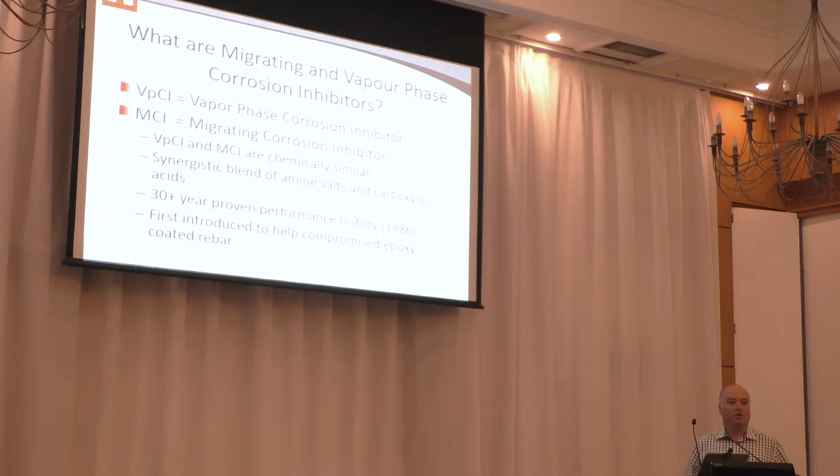So I'd like to start by telling you a bit about vapour phase and migrating corrosion inhibitors. And essentially, they're the same thing, the same technology. They're a blend of amine salts and carboxylic acid. They work in different applications. Migrating corrosion inhibitors are generally for concrete, and they work by migrating into the concrete, or as a vapour into the concrete, to the rebar, and the vapour phase ones are generally for all other types of applications.

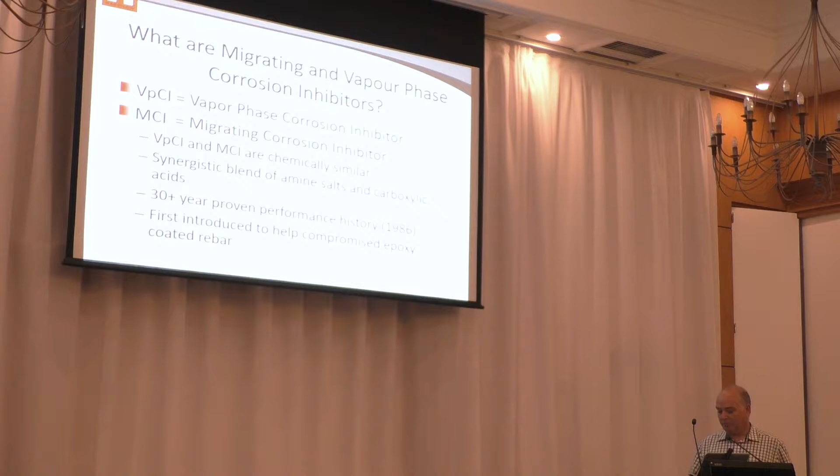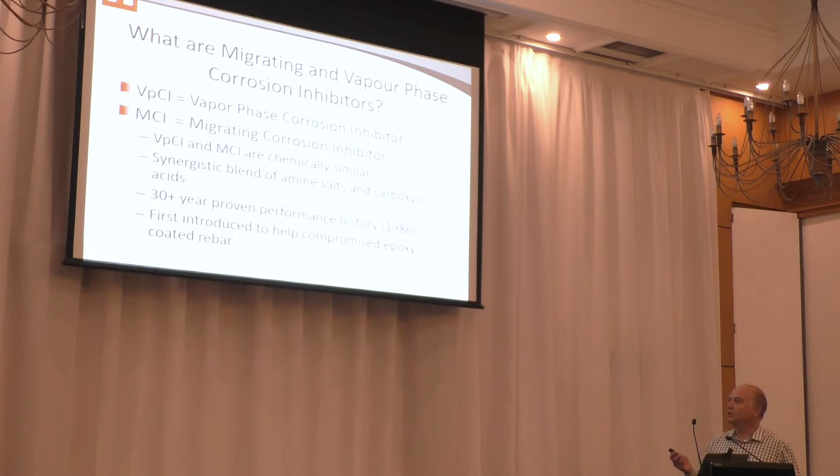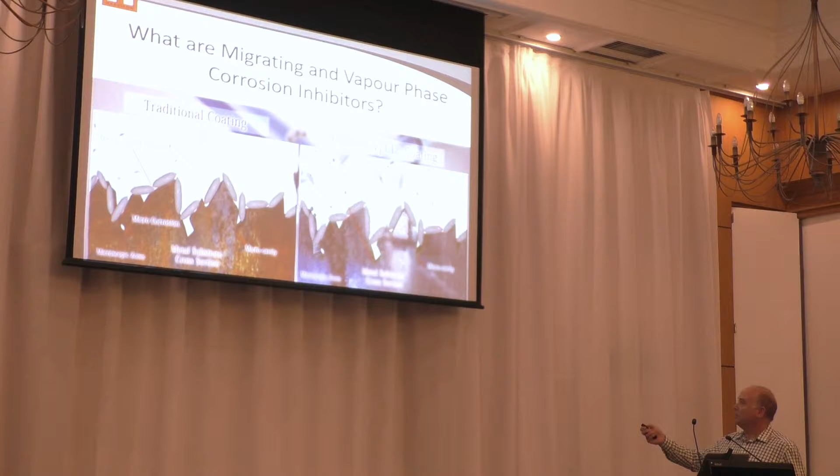Been around for a long time, been used in a lot of different applications. They're one of those other dark arts that we talked about, and there's a good photo of dark art coming up as well. So it's not a great photo, and it's no representation of any of our coating suppliers in the room, but you'll see with the traditional coating there are a few gaps here and there, but with the vapour phase, the theory is that vapour goes down into those gaps and seals them off. So you've got full protection at the monomolecular level with a very good coating over the top of it.

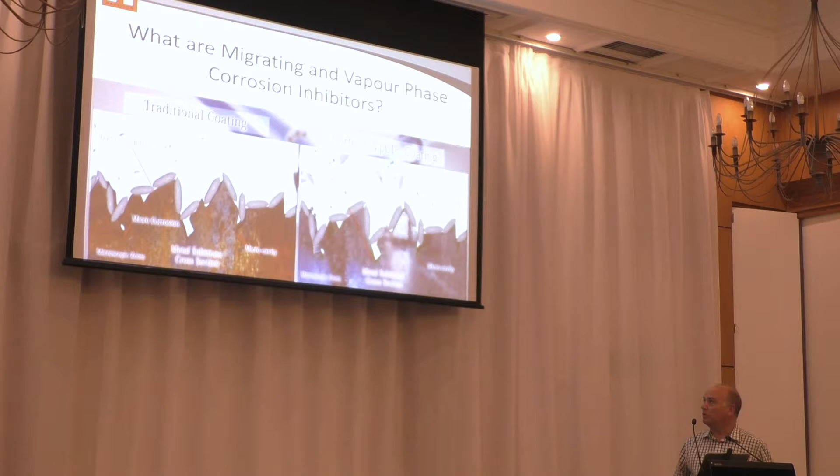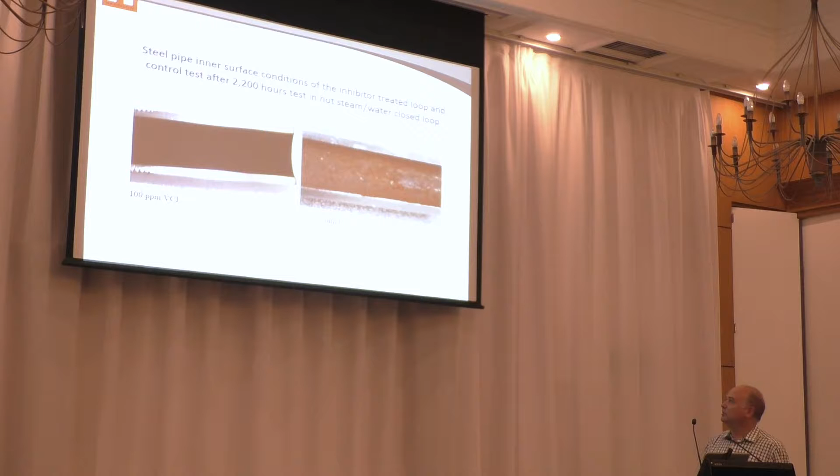So we're not saying do this instead of a coating, it's do this with a coating, and it also is complementary with CP as well. Here's the dark art I was talking about. This is vapour phase corrosion inhibitor at 100 ppm on a steel pipe, and here's the control pipe with the rust. It's up to 2,200 hours.

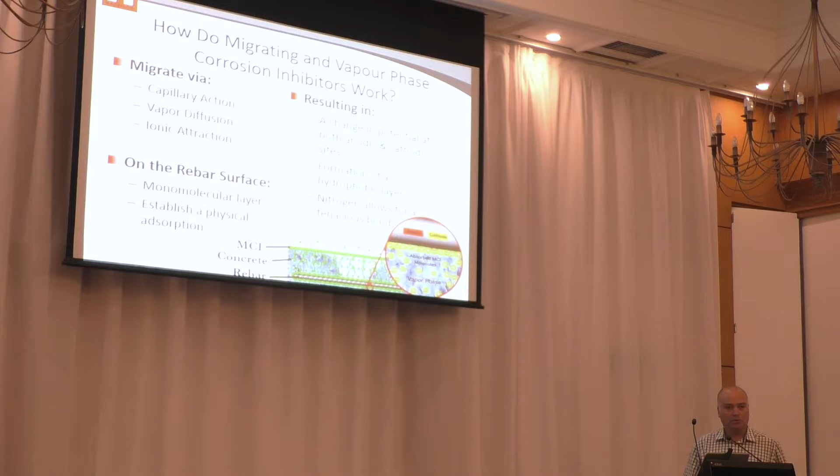How do they work? You may be familiar with the migrating corrosion inhibitors, used a lot on concrete, used to seal rebar essentially. So where you've got breaks in rebar or breaks in the epoxy on rebar, you can paint the product on, then seal it, and the migrating corrosion inhibitor goes through the porous concrete and attracts to the rebar, and it sticks on the rebar at a very small monomolecular level there, just to seal the steel.

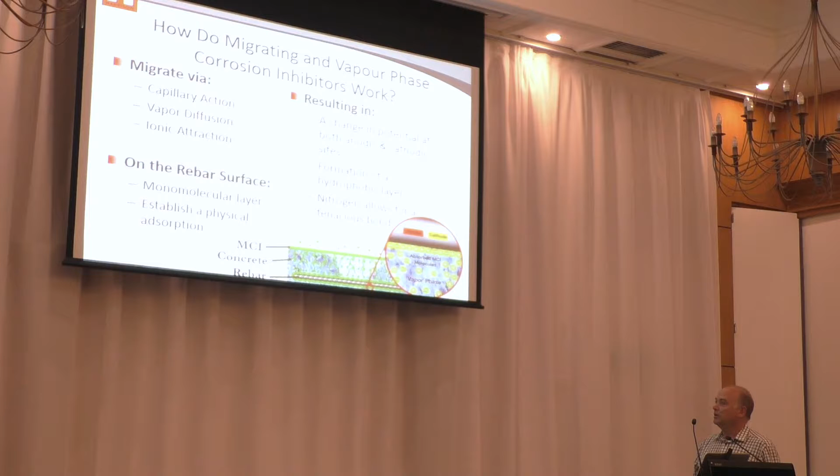We use a lot of these in electrical cabinets, where you've got maybe down at the port or down at your sewage plants where you've got really aggressive conditions. We'll put a vapour phase corrosion inhibitor into that control box. It emits the layer of VPCI across all the metal surfaces and stops it corroding, and it doesn't interfere with the electrical equipment at all.

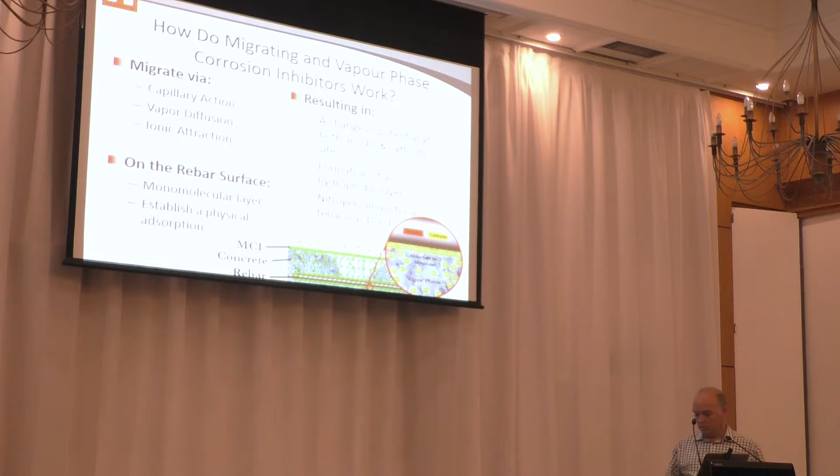We're doing some work with Refining NZ at the moment, because they are very conscious about where they are in the environment, very close to the water. So we're doing some work with them on their electrical boxes.

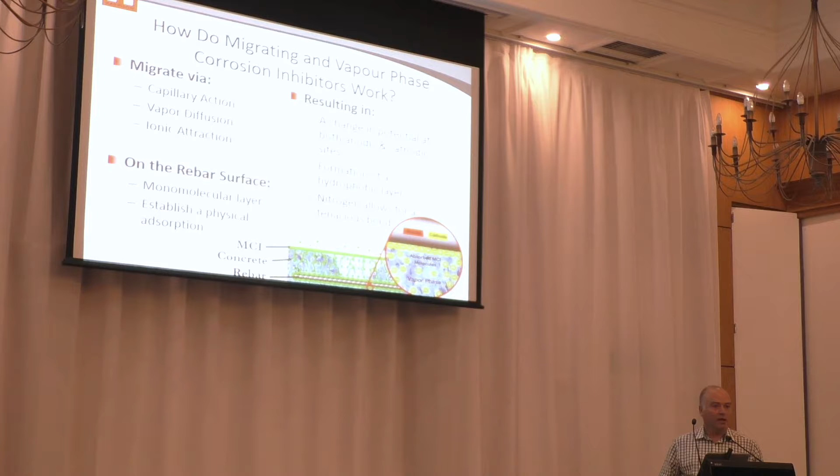So Wayne talked before about corrosion under insulation, and this is quite common in a lot of our industries, oil and gas. It's also very common in the dairy industry. There's a whole lot of pipes out there, a lot in geothermal as well, which are insulated, and people walk on them, have all sorts of issues with, climb all over them, do repair work on them, and can cause a whole lot of issues.

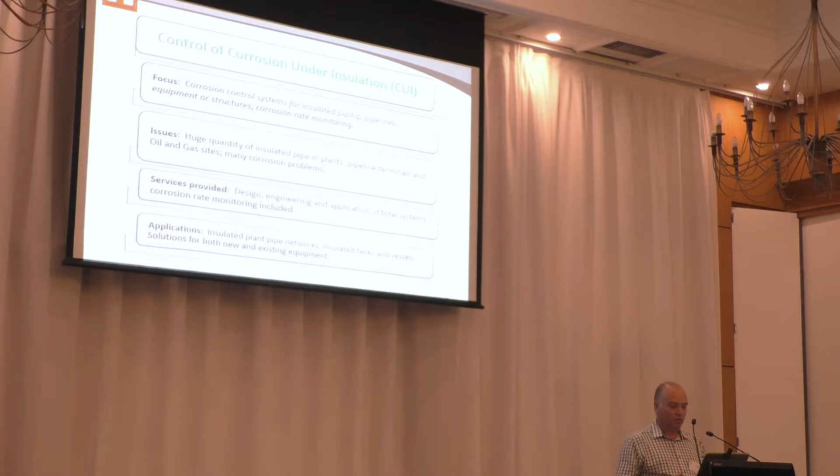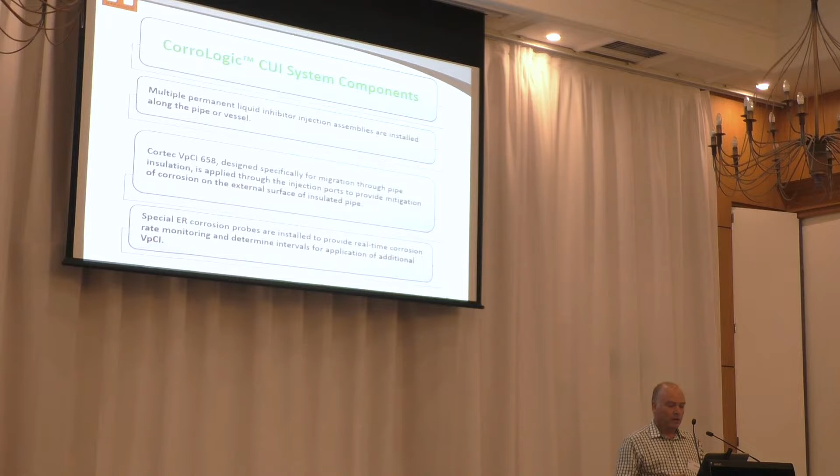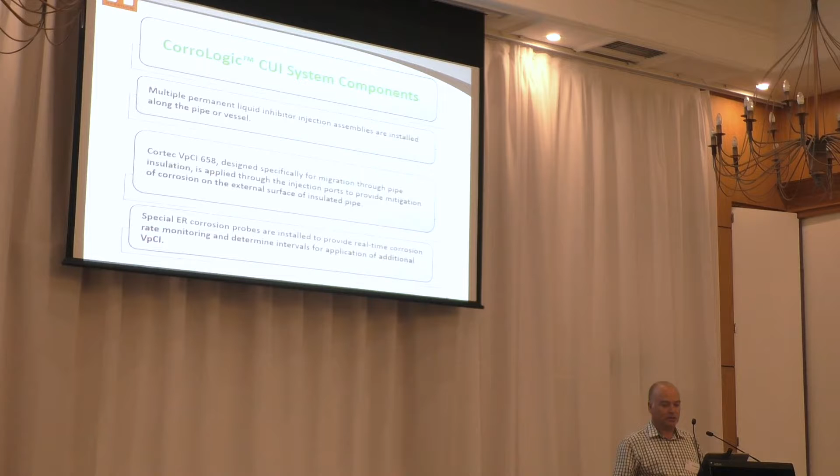You'll notice on the slide over here that the banner that Wayne probably put together, or Ron put together, it's got a whole lot of pipelines on there, and if you have a close look at it, you'll see inspection ports and probe ports and all sorts of things on there as well. So it looks a bit like that. You've got the permanent vapor phase inhibitor injection points and then the probe points as well to measure.

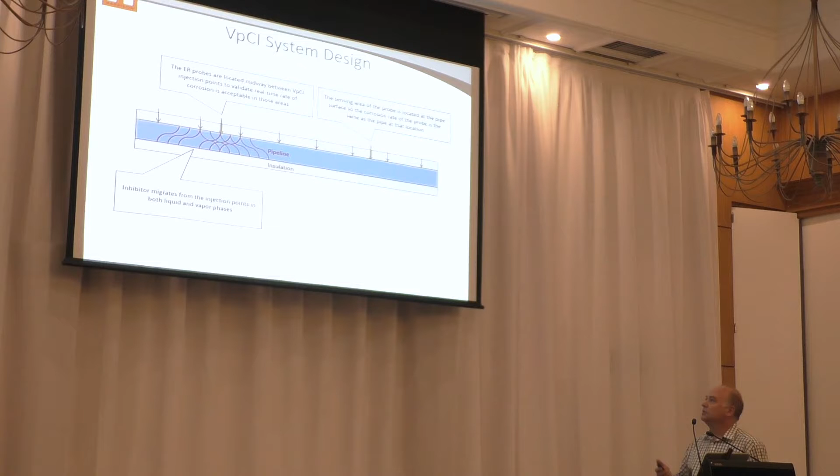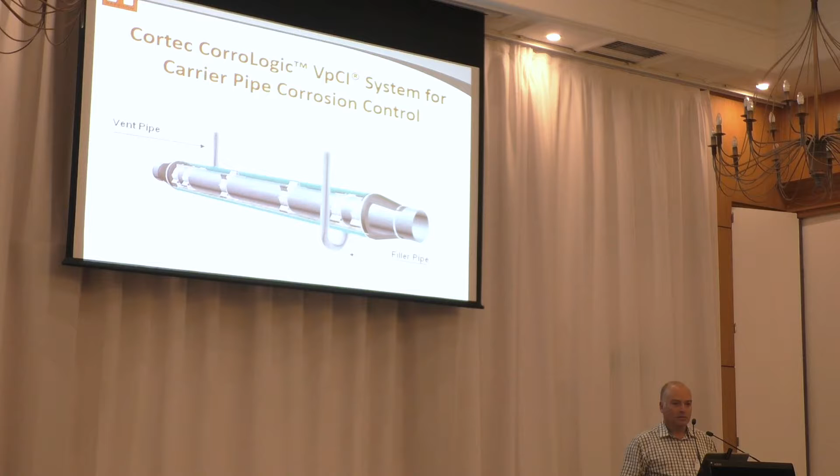We inject the migrating corrosion inhibitor in, and it migrates around the whole surface. So it's going in at one point, but it's continuing around the whole pipe surface, and then we've got monitoring points as we go. You would have seen a few of those around Taranaki, no doubt. Ron, you seen any of those? Yeah. A lot of those around, so that it's just a graphic of that.

And so here we have how it works. We've got the inner carrier pipe and then on the outside we've got the outside casing. And the vapor phase corrosion inhibitor is in the water phase. It's on the interface between the water and the air, and it's also in the air phase. And it's protecting the carrier pipe and the inside of the casing as well.

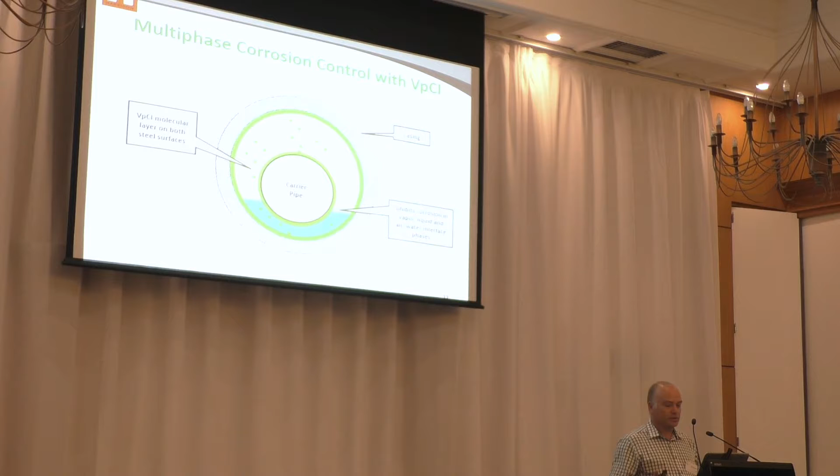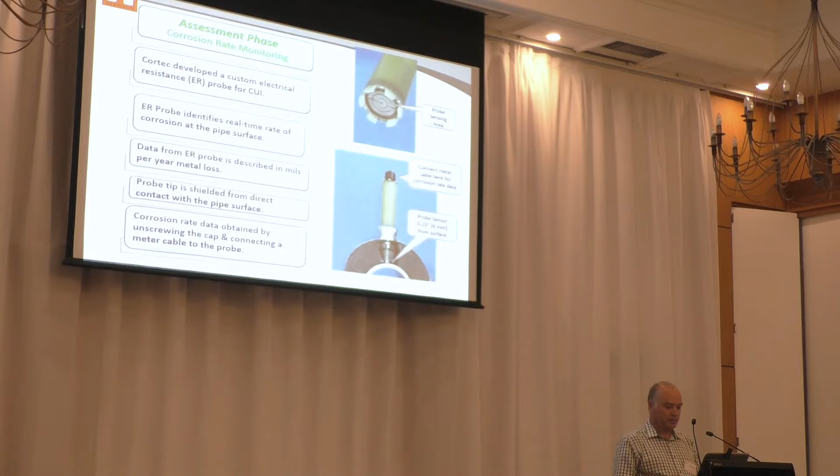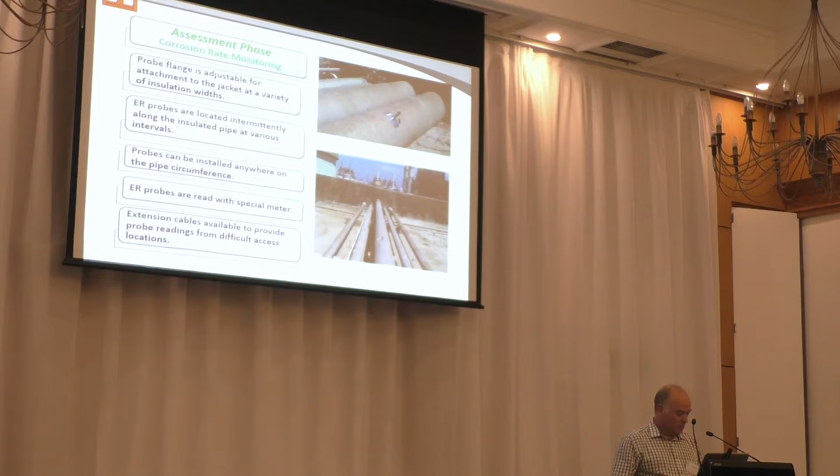So here we have the system. The CorroLogic system is to apply the VPCI, put in the probes at the same time, intermittently test the data in real time, and replenish as needed. And they say that the VPCI will last up to a couple of years, but it depends how long it's in the system and how well sealed the system is, and what's on the outside of it.

Because it migrates to metal surfaces, if there's a way for it to get out to attract to a metal surface, it will. We found that in the food industry when we did some cabinets with them. It's nearly all stainless steel in a meat plant, and they've got a lot of water and other issues. So in their electrical cabinets and in their control boxes, we put the corrosion inhibitors in there. And if they're opening and closing all the time, we got about a 2-year life out of them. If they kept them sealed, we've had some up to nearly 4 years without any sort of corrosion issues at all.

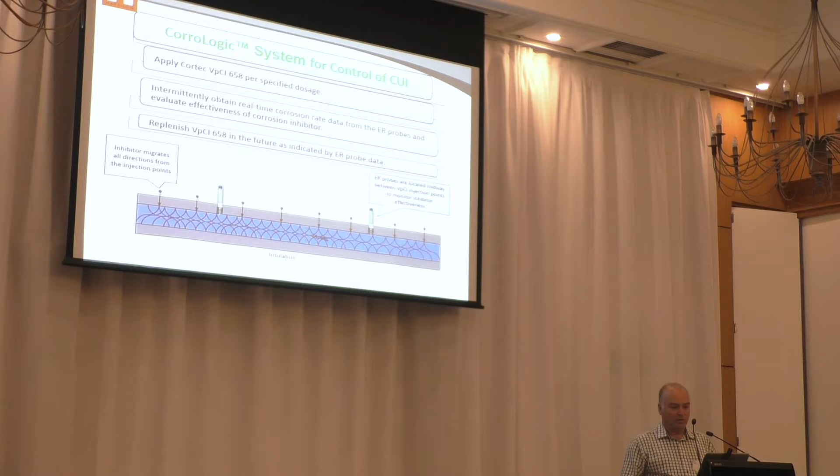The other thing I wanted to talk about today was a real life case history, and it's a heat exchanger bundle, and it was preserved using the Cortec. This was done in Australia. Some of you might recognise it, some of you won't. I won't tell you where it's at, just due to confidentiality. But yeah, it's been around for a while.

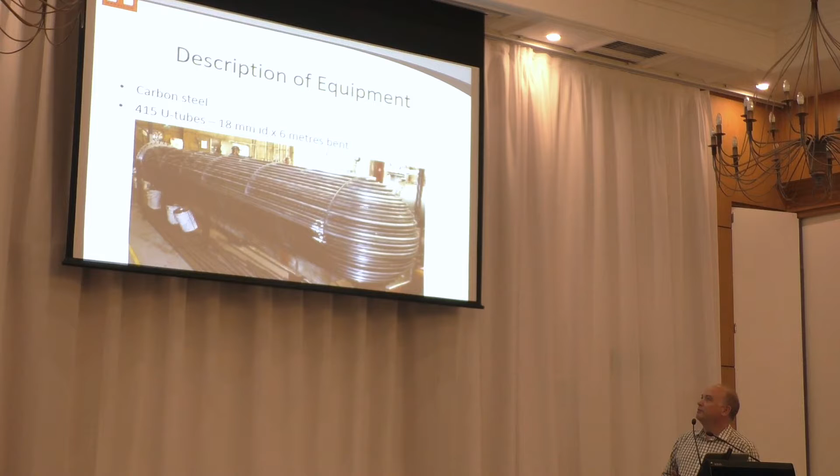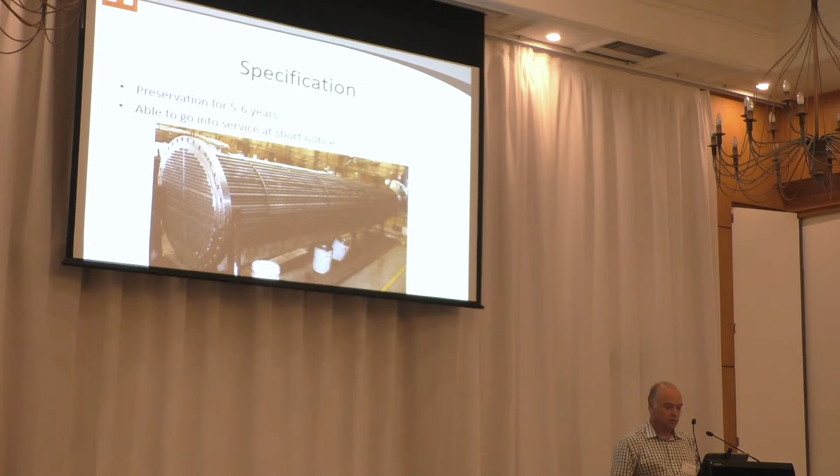So it's a carbon steel shell and tube heat exchanger. So there's 415 tubes. They wanted to lay it up, and the scope was to preserve it for 5 or 6 years. Okay, and they also wanted to go in at short notice. So what do we do? Initially we fogged it with a VPCI powder. So we fogged in all the tubes.

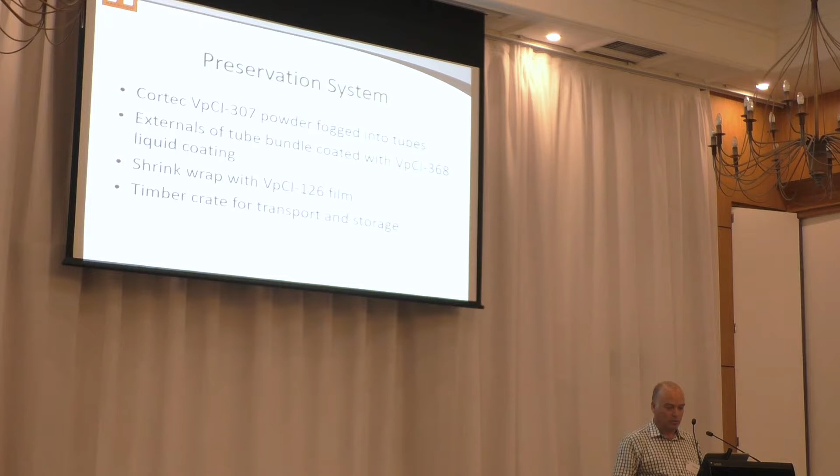That went on for some time, and then we sealed the tubes. We then applied the liquid coating to the outside. We shrink wrapped it in another film which contained the VPCI, and we put it in a timber crate and off for storage. So we fogged all the tubes, as I said, and then we sealed each and every one of them. So we had the vapor phase corrosion inhibitor inside the tubes.

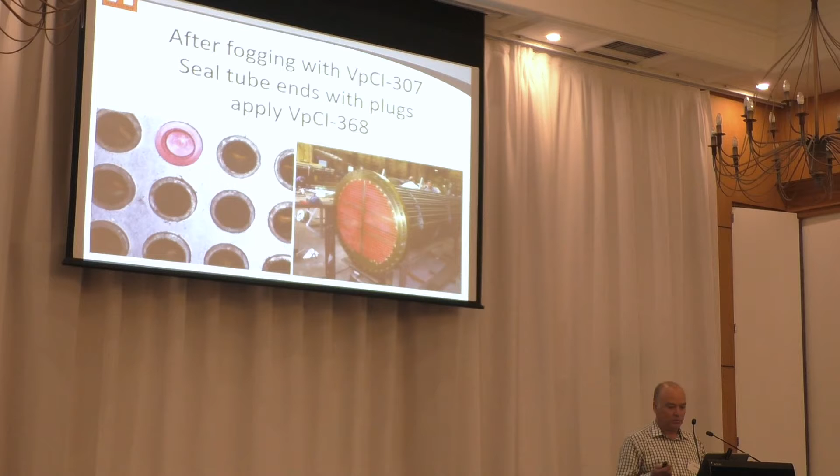We then coated the outside of the shell and tubes, and then we wrapped it in the VPCI film. Now this film has got the vapor phase corrosion inhibitor inside the film. So when we wrapped it around it, it was emitting vapor phase corrosion inhibitor onto the metal surfaces as well. We can get this in multiple lengths and sizes. You can get it as small as a Ziploc bag to put your tools or your fishing gear in, right up to bigger things than this.

There's a good thing on the web if you get a chance to go. They were wrapping a tank in one of the Arab countries just to see how well it worked. They had one tank standing out just in the desert, and they wrapped another one. When they came back, I think it was 6 months later, they couldn't start the first tank. It was all corroded. There was all sorts of issues. It took them nearly a week to get it going again. They unwrapped the one that was in the bag and it started up straight away. So if you get a chance on YouTube, go and have a look.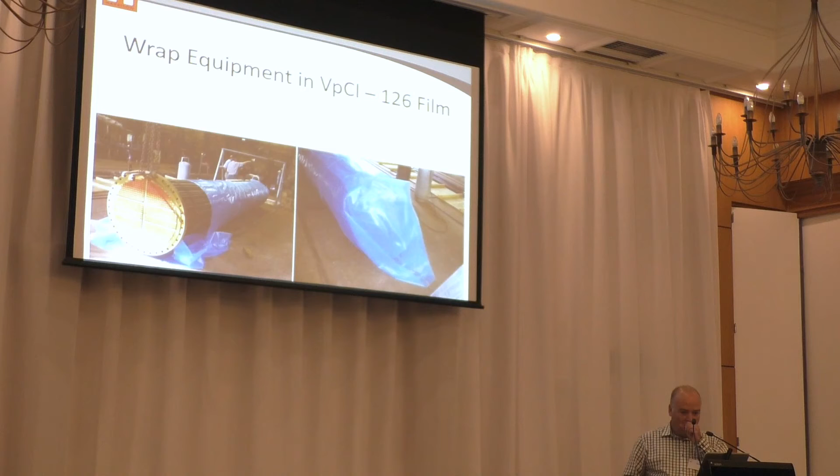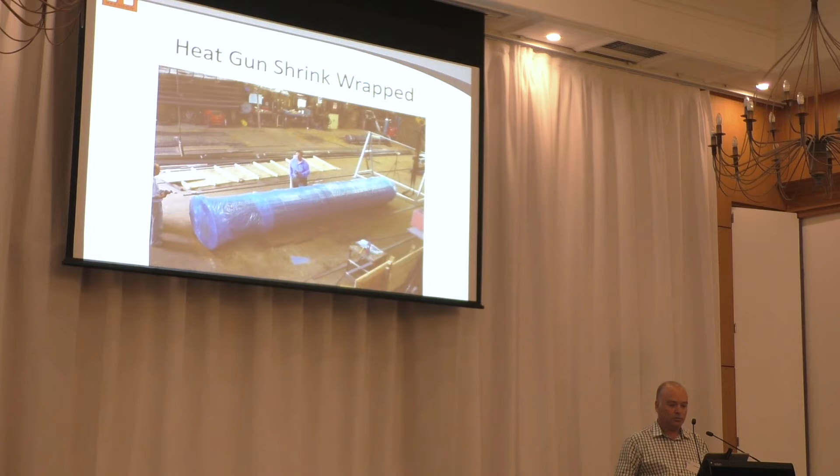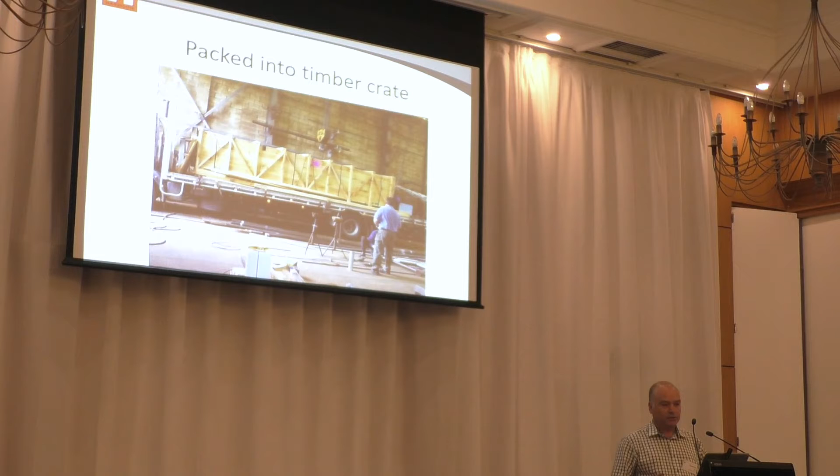Once they finished doing that, they got the heat guns out and they shrink wrapped it so it's all ready to go, nice and tight and sealed. And then they packed it into a crate. And that was a few years ago now. It's still in the crate. They haven't had to use it as yet, but it's all ready to go when they want. They've done some inspections and there's no corrosion. So really interesting stuff. If there are any questions you want to ask me about that, feel free to do so. I can explain a few other bits if you'd like.

Just on that, I think the point you missed, which is important because we use it a lot, is the product is water soluble in most instances, so you don't have to flush it. In the old inhibitors, you have to flush them out. We actually mothballed a total gas production plant. And at the client's request, we double dosed it with immersed product and powders in containers. We actually got 5 years life out of it by double dosing. They were very happy, and after 4 years we went in and retreated the whole thing again.

Do you know what dose rate you used when you said you double dosed it? Do you know how much you used? Yeah, we used about 200 kilos, so it was a fairly big plant. But we sealed off pipes that were out in the yard, dosed them up. We had heat exchangers, we had printed circuit heat exchangers, they filled with water and put it in. We had pressure vessels, we had everything.

It was a huge gas process plant that was subject to litigation, so we had to preserve it. And it worked really well. The only issue we had is the client wouldn't invest in atmospheric corrosion probes to prove how it went. So rather than invest in probes, which would have only cost them a couple of grand, they got us to retreat the whole thing again. It's cost them a fair bit more than a couple of grand, no doubt.